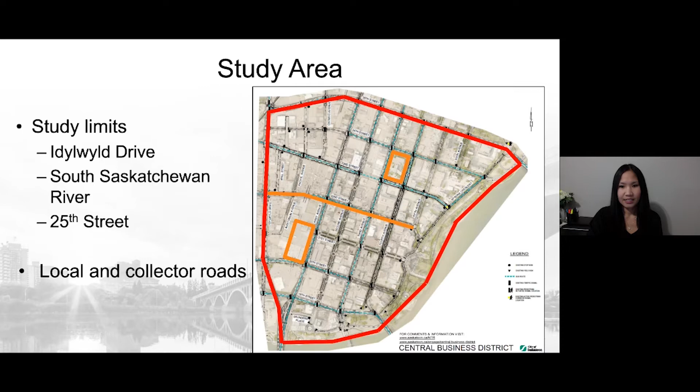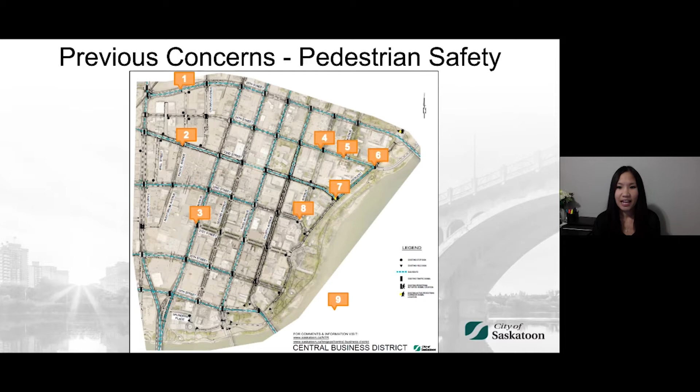A couple comments have been submitted, but they're not about pedestrian safety, so I'll read them out a little bit later when we get to this theme. Yep, we have traffic control next as the next theme, and then we have speeding, shortcutting, and then other concerns. So we'll get to those.

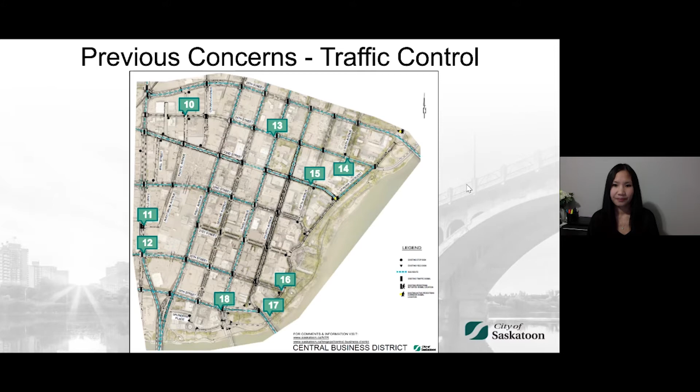Okay, and that's all that's come in about traffic control so far. If you have more pedestrian safety or traffic control concerns, you're not limited to this time, you can enter them at any point and we'll get to them. But I think you can go on to your next theme, Mary-Neil.

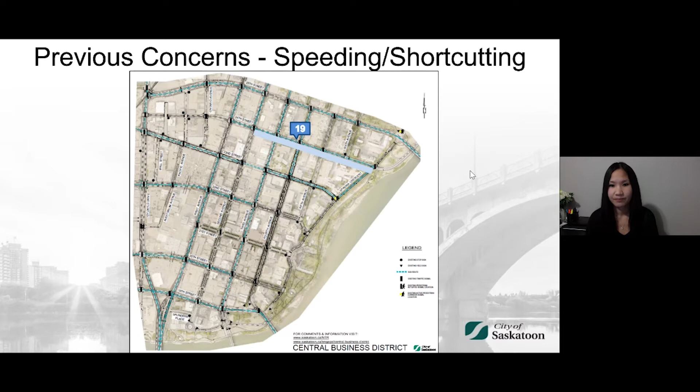This intersection will be reviewed as part of the Neighbourhood Bikeways project, where 5 corridors have been identified to develop neighborhood bikeways. So you can go ahead and enter your speeding and shortcutting concerns into the Q&A box and we'll read them out loud.

Okay, so we had one come in about Spadina. I think many people shortcut onto Spadina when 4th Avenue may be a better option anyway.

Another one came in: please no for number 20, please don't make it that other request that you got about pedestrian and cyclist only roadway, this person does not agree with that. That matches with the 3-way stop, not supporting the 3-way stop on 20th and Spadina as well. So that makes sense. And somebody else said, let Spadina flow as it is now.

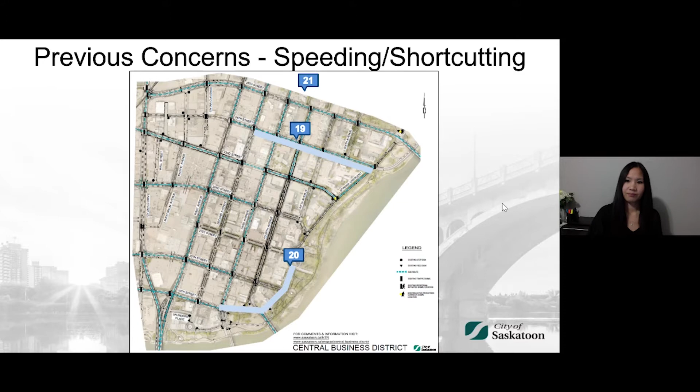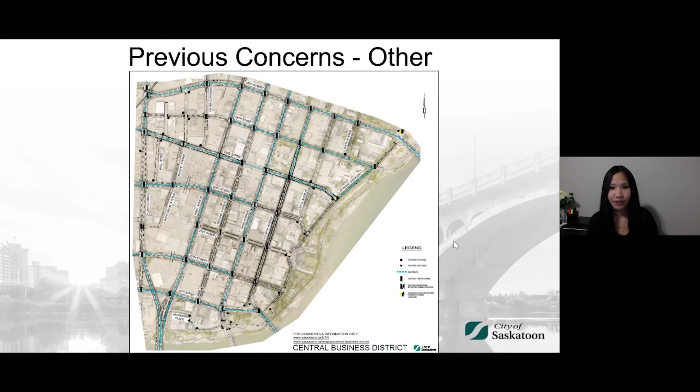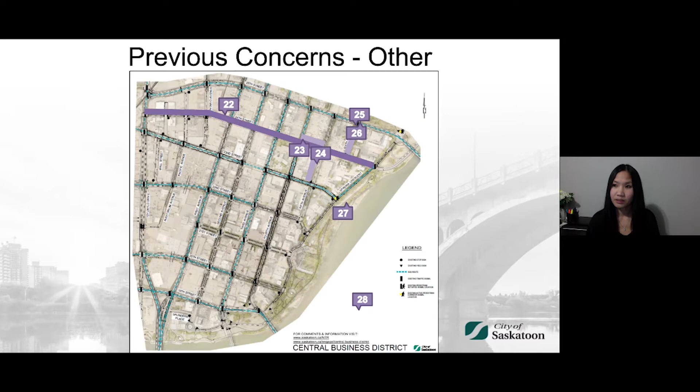So this person clarified that 24th and Spadina question, that it's turning east to go under the University Bridge. Oh, so from Spadina to go east, I see. To take the ramp under the bridge, I think. Okay, yep, you can see that on Google here.

Yeah, and they're saying for 24th and Spadina, the direction is to turn northbound onto Spadina along the river. Okay, because we have 2 different comments around that, right? And for the 25th and 3rd intersection, it's to turn westbound onto 25th from 3rd.

Okay, yeah, 3rd has a little bit of an interesting configuration at 25th because it narrows quite a bit on the north side. Okay, and let me just double check, make sure I've got all of those.

Okay, here's one. I would like to see a plan that shows some downtown avenues made narrower, perhaps one-way streets. Some avenues are very wide, even compared to larger Canadian cities. Wide roads can give the impression that it's easier to go zoom zoom.

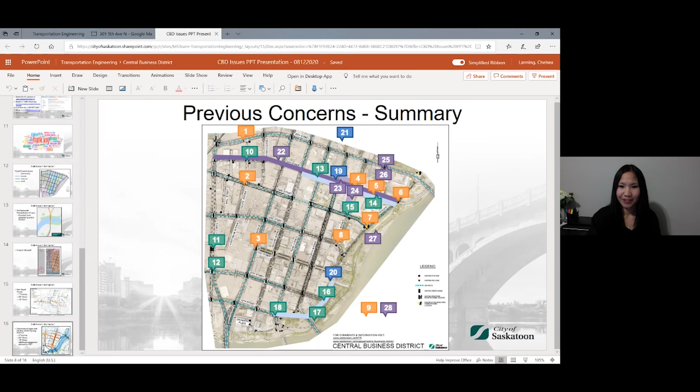Do you want to talk about the downtown cycling network, Marinelle? Sure, yeah, I can provide an update related to that comment. Perfect, yep, I can do that. And then Chelsea's pulling up the slides, so thank you, Chelsea. Let me update here.

So the Downtown All Ages and Abilities, also known as the AAA Cycling Network, has been endorsed by Council. You can see the 3 streets here on the slide: 3rd Avenue, 23rd Street, and 19th Street. Those are indicated on this slide in the map in orange. Council deferred implementation decisions until additional engagement can be completed. We are planning to proceed with that work in 2021. If you would like more information on that project, we can paste a website link in the Q&A chat box for you.

Yeah, I'm just looking for the link here. Here it is. Oh.

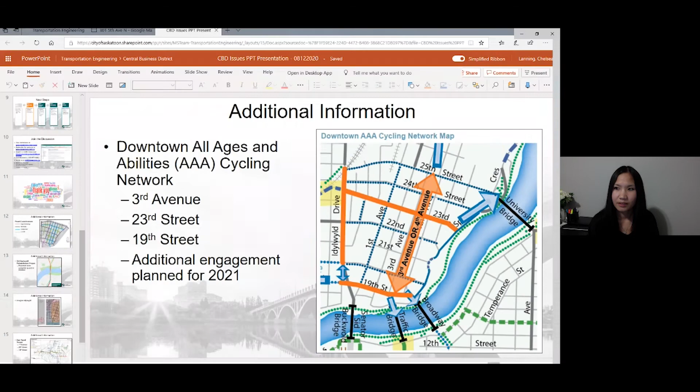And then there was just another follow-up comment to that 2nd Avenue, closing it to make it pedestrian and cyclist only, that it's 2-way traffic from 23rd to 19th. I believe it's 2-way all the way to Spadina. Yes, it is, I think.

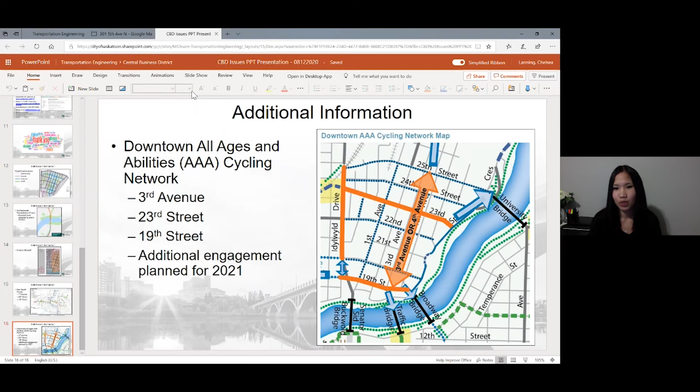Okay. Was there anything else you wanted to provide updates about, Marinelle? I can go over some of the projects in the city area. We have slides for that as well, and I went over it in the issues and other projects video clip as well, so I can give a little brief update on those.

Okay, so the Sid Buckwold Rehabilitation Project: the 2nd and final phase of construction on the Sid Buckwold Bridge is well underway on the east half of the bridge, and it is proceeding on schedule. Construction is expected to be completed by the end of October, and we will organize data collection for this neighborhood traffic review only after that project is complete. If you'd like more information, we can paste the link to the information on the website in the chat box as well.

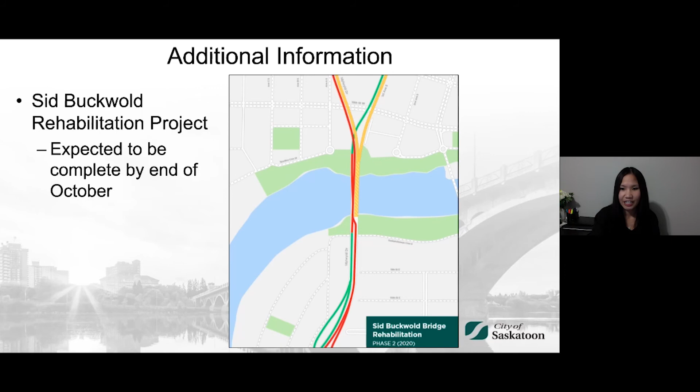And then another project is the Imagine Idylwyld project. This is a design initiative to improve the function, safety, connectivity, and quality of the roadway and public realm along Idylwyld Drive, between 20th Street and 25th Street. The preferred design minimizes travel time for most drivers while supporting all modes of travel and enabling redevelopment opportunities. The concept design enables safer connections for people riding bicycles or walking, and includes better access to the proposed bus rapid transit station near 22nd Street. We can provide a link for that too.

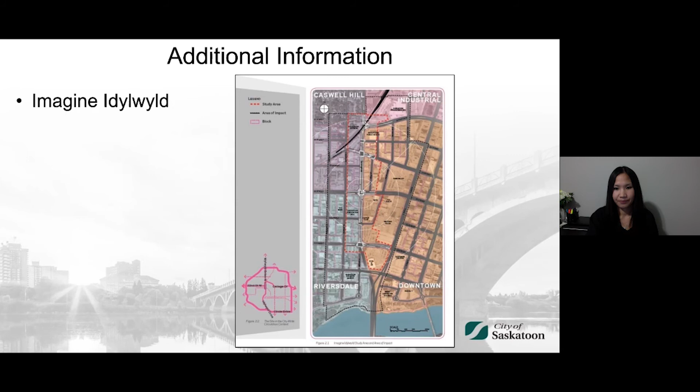Another project is the bus rapid transit, which we have mentioned. Saskatoon City Council approved the final routing for the bus rapid transit system. The corridors are listed here on the slide, including 1st Avenue, 25th Street, and 19th Street. Work on the design is underway, and construction is slated to start in 2022.

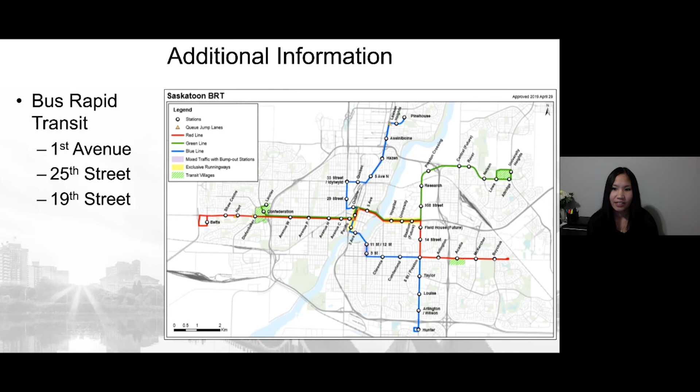And the Downtown AAA Cycling Network, which you've heard about already.

I'm just trying to catch up on the links here, Marinelle, sorry. Oh, no worries.

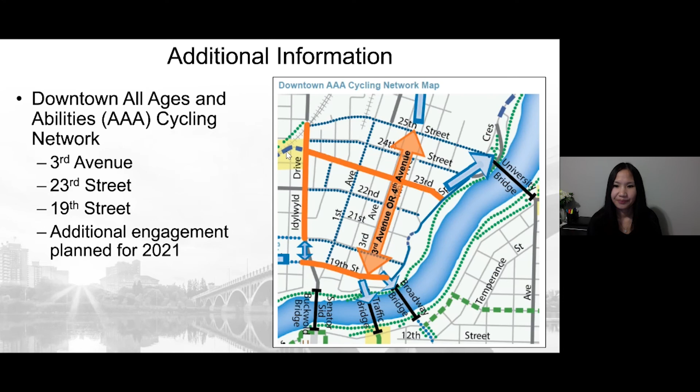And if you missed the links, most of it's available through the search bar on the Saskatoon.ca webpage as well.

Okay. All right, I'm not seeing anything new in the question and answer box. So maybe we should move on to the next steps.